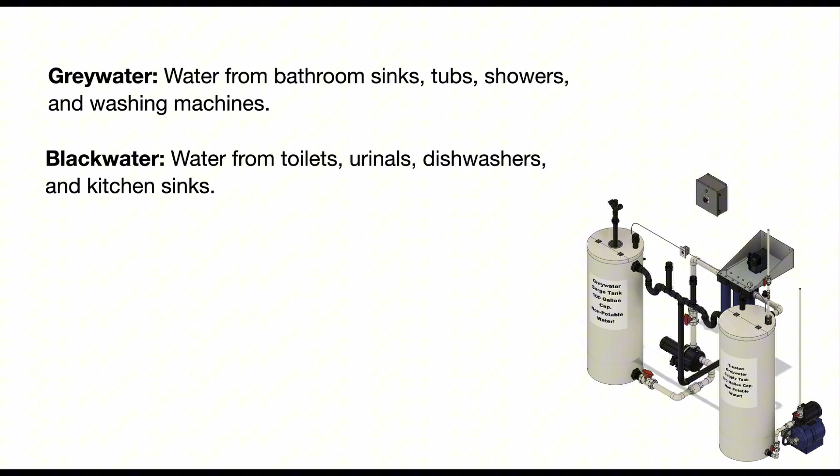So let's define some terms. Graywater is water from bathroom sinks, tubs, showers, and washing machines. Black water is water from toilets, urinals, dishwashers, and kitchen sinks. Non-potable water is water that is not safe to drink, cook, or bathe with. Potable water is safe to drink, cook, or bathe with.

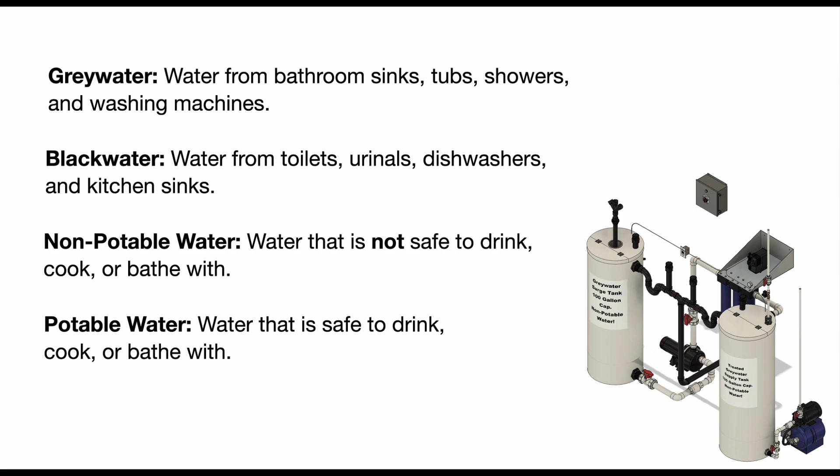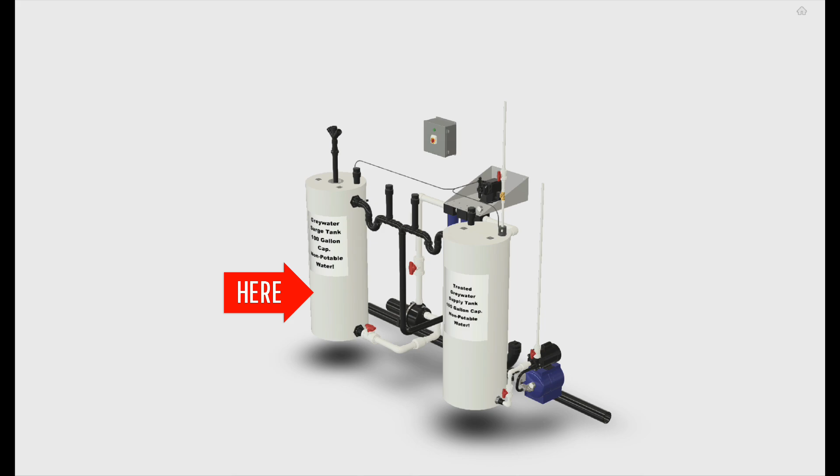So we are only reusing gray water, not black water. Here is a complete home graywater reclamation system. It's a 2-tank system. The first tank you see here is the surge tank. That's where all the raw untreated gray water comes into the system from your washing machine, bathtub, shower, and bathroom sinks.

There is a float switch inside that surge tank that, as the water level rises, floats up and turns on the filter pump, pumping the water through a 3-stage filter.

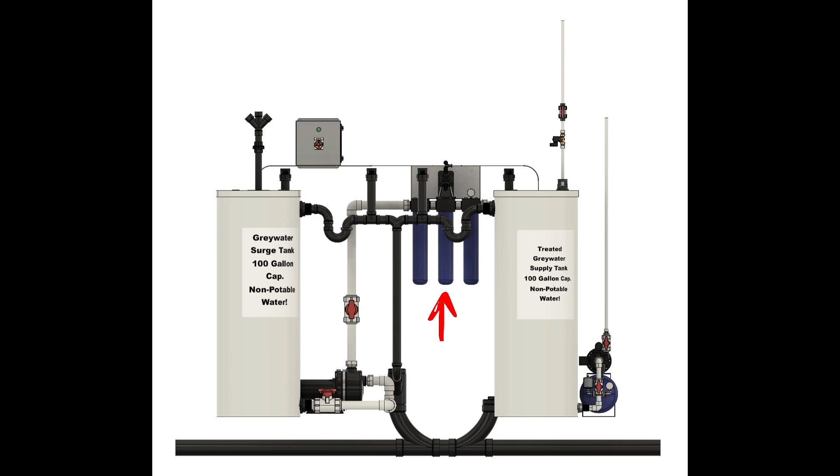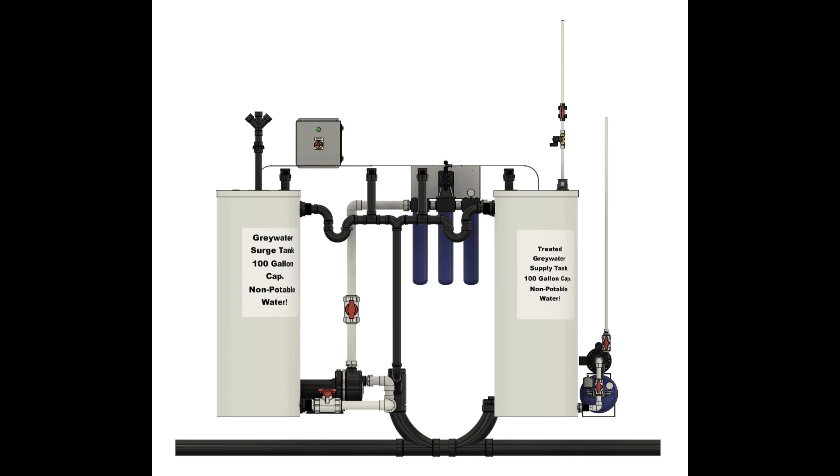They're cartridge filters. The first one is a 10-micron sediment filter. The second filter is a 5-micron granular activated carbon filter. And the third and final filter is a nanofiber filter, although you could use a reverse osmosis filter, and that's mainly for getting rid of the soaps in the gray water. However, it gets rid of a lot of other contaminants in the water as well.

Each of the tanks has a UV sterilizer light inside. There's also an aeration pump that is constantly blowing a small amount of air through air stones submerged inside each tank, to constantly aerate the water in both tanks. That way the water can never grow stagnant.

As the water passes through the 3-stage filter, it goes into the supply tank. And whenever you flush your toilet, the supply pump, a shallow well jet pump, will turn on and supply treated gray water to flush and fill your toilets.

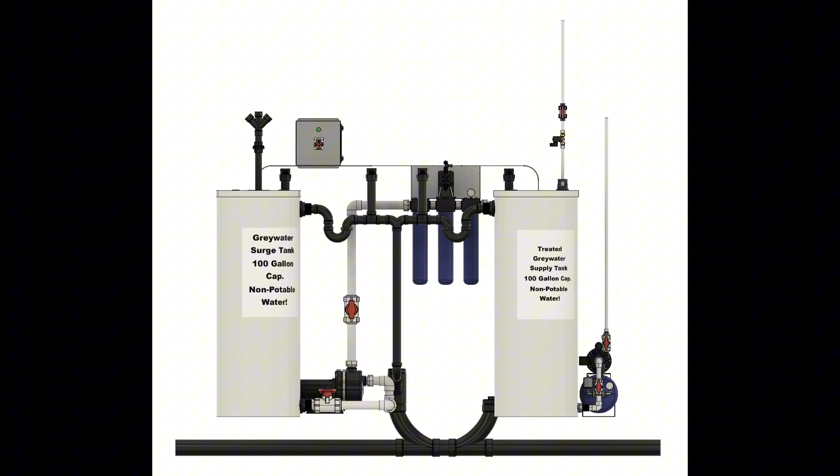It can also be used for landscape irrigation. However, I don't recommend it because unless you have a drought-tolerant landscape that requires little to no water, you're going to burn through your treated gray water very quickly if you're trying to irrigate your landscaping and flush your toilets. And if you're even using your treated gray water to supply water to your washing machine, you can see how you'd very quickly run out of treated gray water.

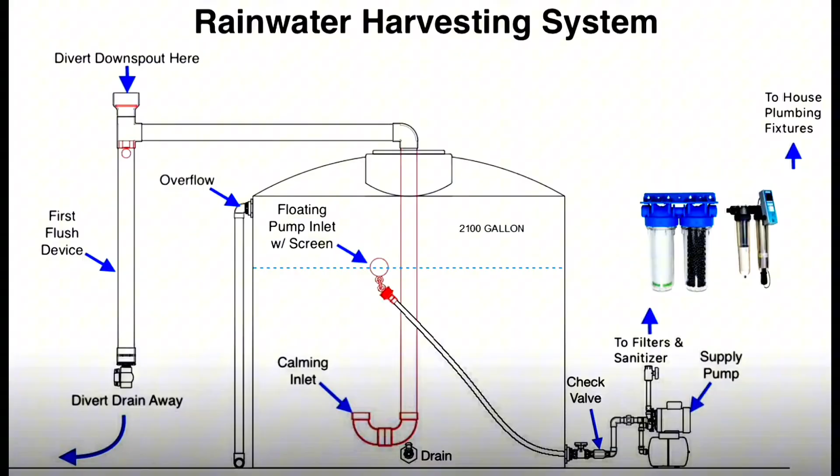So instead, I would recommend using a rainwater harvesting system if you want to irrigate your landscaping. I'd still highly recommend a xeriscape landscape, drought-tolerant native plants, decorative river rock, etc.

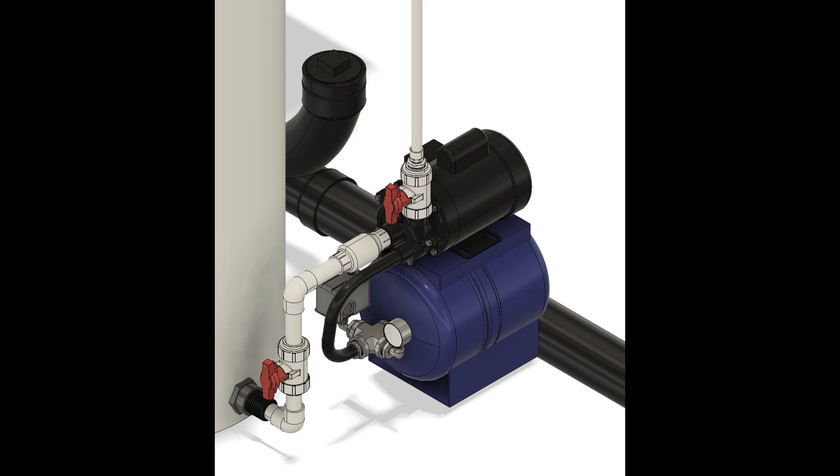That supply pump is a shallow well jet pump. It's controlled by a pressure switch. So when you flush a toilet, for example, that pressure switch will detect the difference in pressure and cause the pump to turn on until the pressure switch is satisfied, then the pump will turn off.

There's also a float switch inside of the supply tank to protect the supply pump in the event that the water level gets too low in the supply tank. It's not going to turn the pump on, cavitate the pump, and damage the pump.

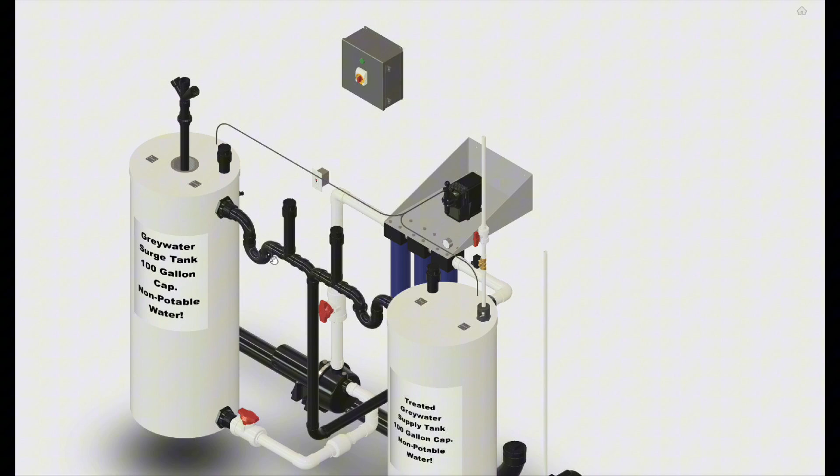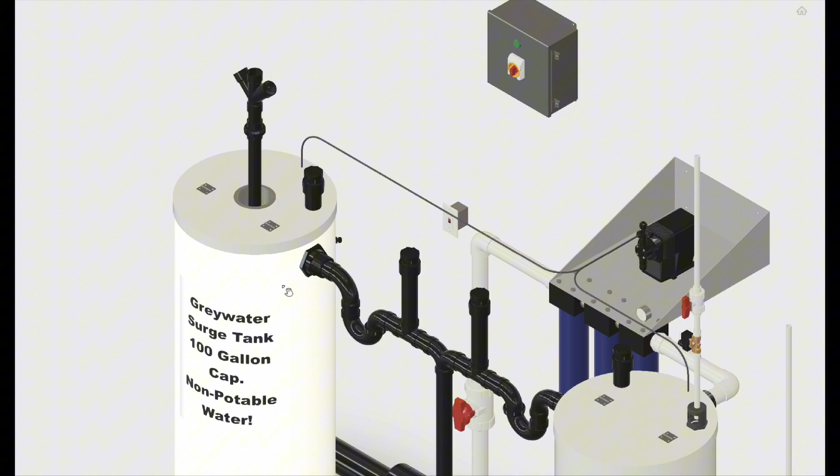There's a second float switch in that supply tank that is connected to a 120-volt solenoid valve, a freshwater makeup valve. As the name implies, that makeup valve is only to make up water inside the supply tank in the event you're not producing enough treated gray water to meet the demand.

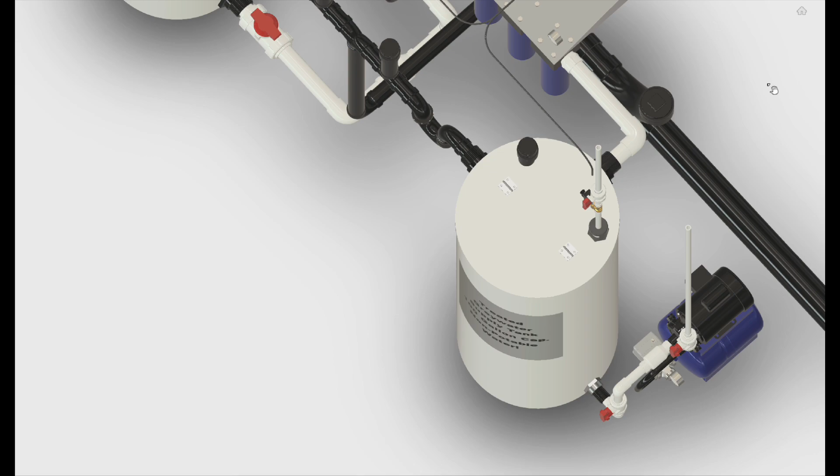That's why it's critical to make sure you size your tanks properly. I'd rather err on the side of caution and size them a little bit bigger. So how do you determine what size tanks you need? We'll cover that later in this video.

So that pretty much covers all the main components of the tanks and the pumps. Let's take a look inside the control panel now.

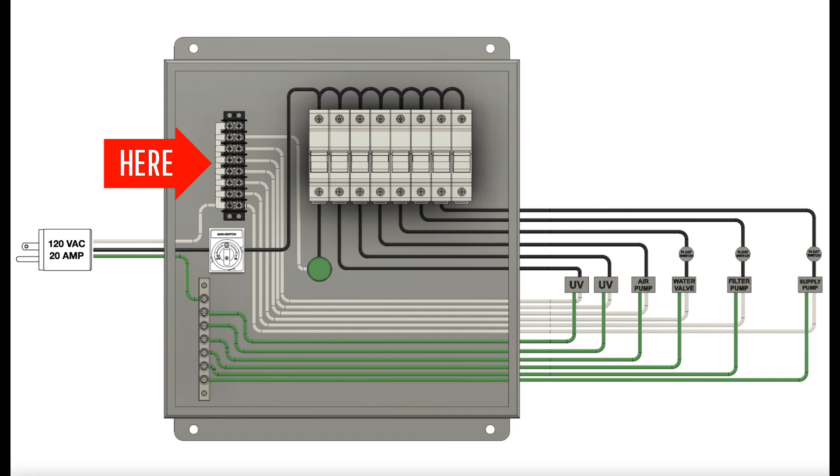There are little metal U-shaped connectors that connect each of the screw terminals on the neutral bus bar. Then you have your main black hot wire coming into your disconnect switch, and then it goes up to your fused terminal blocks. Each terminal block is daisy chained together to get 120 volts.

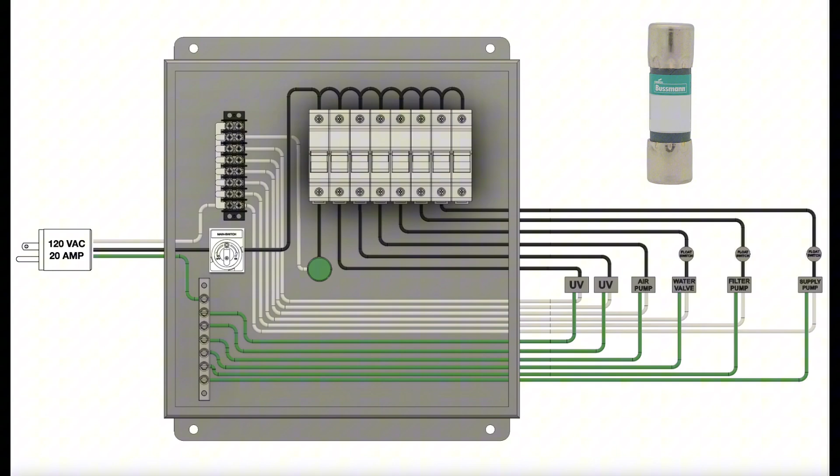There's a fuse inside each one of those blocks, and you can see the little green indicator light. When the power is on, the green indicator light will turn on, giving you a positive indication that the power is on and the system is on.

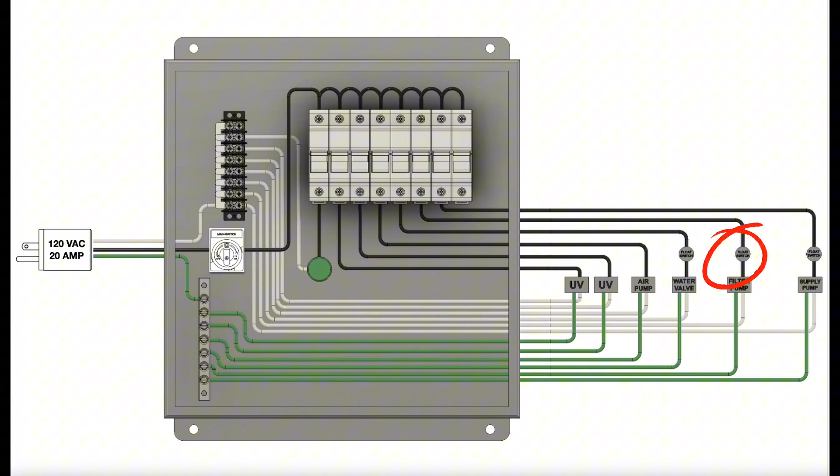You can see how all the wires are connected. You've got a hot wire going out to each of the components, both UV lights and the air pump. You also have your float switch that controls your filter pump on and off functionality, another float switch that protects the supply pump, and another float switch connected to the solenoid valve.

All of these components together need to draw at or below 80% of the circuit capacity. The pumps and UV sterilizers I spec'd out draw below that 80% capacity that the NEC requires - you can't draw more than that on the circuit. And again, it's plugged into a GFCI outlet.

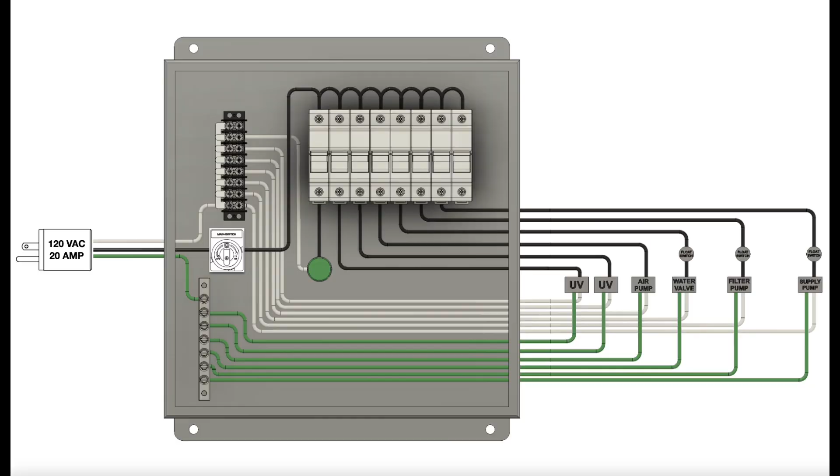This air gap fitting is a plumbing requirement, so you don't accidentally have a situation where gray water gets siphoned back into the fresh water supply line. Just FYI on that.

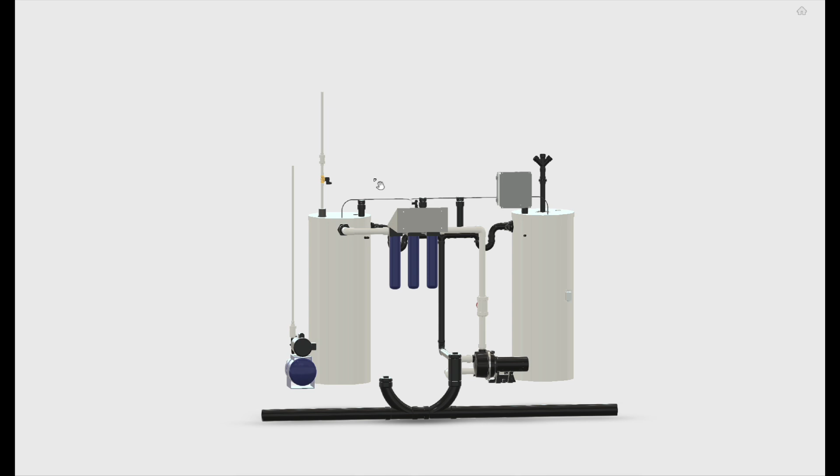In this model, you can see we simply teed into the existing sewer pipe in this house. We installed a Y fitting. Where the cleanout was, we simply moved the cleanout up a few inches, installed the Y fitting, and reinstalled the cleanout so it can still be snaked out if necessary. There's a closer look at the cleanouts on the main sewer line for this house.

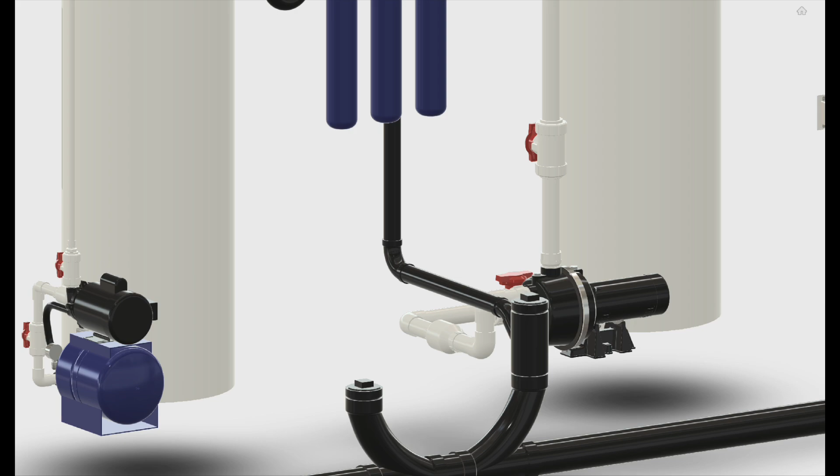You can see what I did there - I just added that reducing Y and then re-added the cleanout plug on top of that Y. The branch on the Y is where the overflow from those tanks is plumbed, so in the event that you make too much gray water, it can go out the overflow, out the drain.

Another option is this here. If you have a floor drain, you can just have your overflow pipes go directly to your floor drain. The floor drain already has a built-in P-trap, so that saves a little bit of work and cost and fittings.

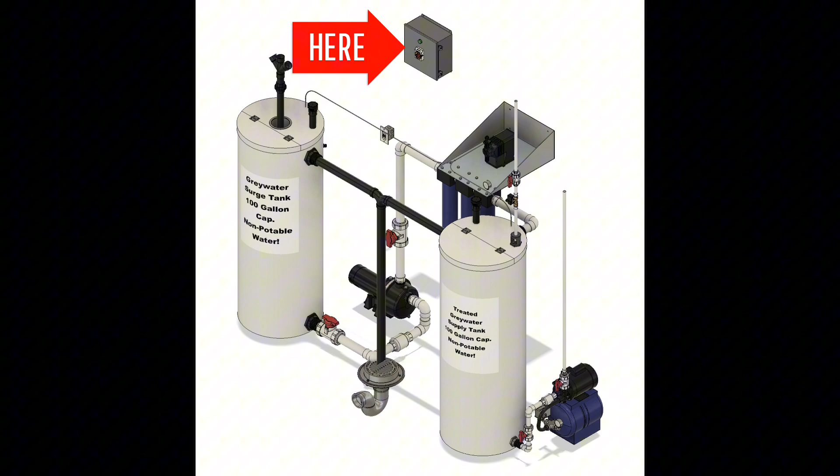So you can see a better view - the control panel there up top, the air pump, aeration pump sitting on that little mounting bracket for the filters.

I use bulkhead fittings everywhere you need to have an inlet or outlet from the tanks. Where the raw gray water comes into the surge tank, there is a metal mesh screen in there to capture large debris like human hair or cotton fibers from the washing machine.

This is what you would install behind your washing machine. You can see the black hose from your washing machine goes into this three-way ball valve. You need to make sure you have an air admittance valve to serve as a plumbing vent.

I bolted it to a wood board, bolted the wood board to the studs in the wall. That three-way ball valve allows you to divert the water either to your Greywater Reclamation system or directly to your city sewer or septic tank, just with the turn of that ball valve.

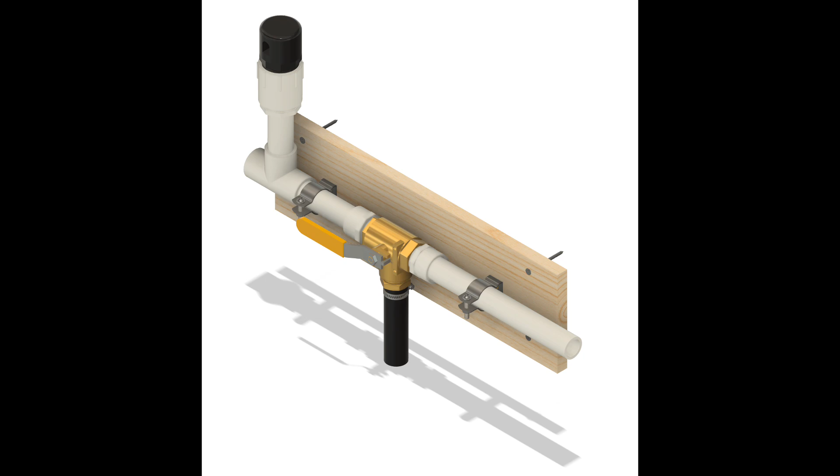This is also another option. If you don't want a complete whole house gray water system, you can do one of these manifolds behind your washing machine and divert the untreated gray water directly out subsurface to your landscaping.

Another option too is you could harvest the AC condensate or drain water from your dehumidifier and have it plumbed to your graywater surge tank as well.

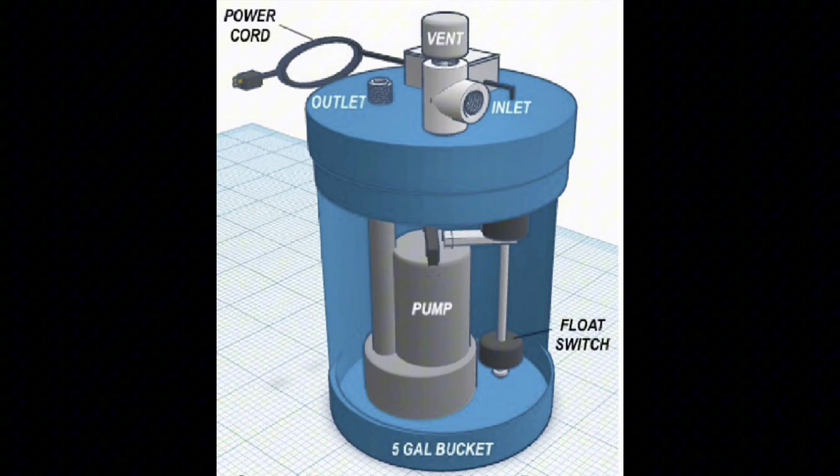Just if you want to monitor your treated gray water quality to see if your filters are working properly, if your system is working properly, that's an option.

Another option is there are independent laboratories, and even your local state government may have a water testing program where you can send them a water sample. They'll first send you a water sample kit. Follow the directions, send them the samples, and several weeks later they'll give you the results. The cost and time frame will vary depending on where you live, from state to state, from municipality to municipality. Or again, you can find an independent water testing lab online if you Google it.

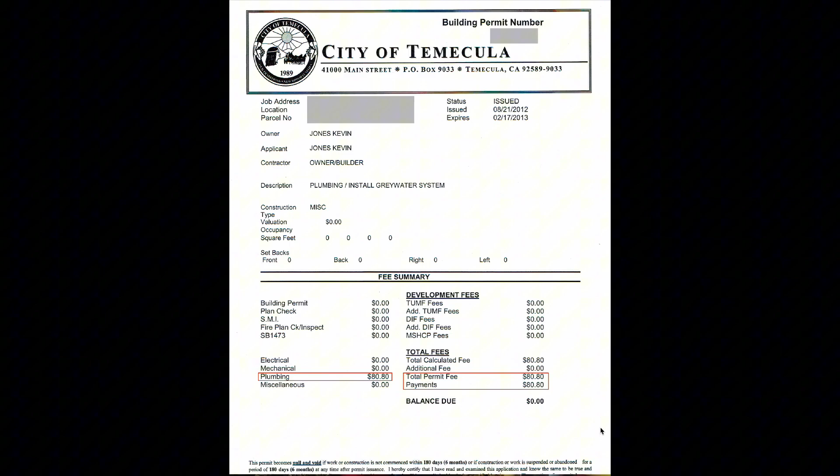So what's the process? Let's talk permitting. At the time I lived in the city of Temecula in California, I had to pay $80 for a plumbing permit. I first had to fill out a permit application, pay the $80, and one requirement was to produce an owner's manual and hang this inspection job card in my house.

You can see where the inspector signed off on it on his final walkthrough inspection. So here's the owner's manual I created. I've grayed out my personal information, obviously. Table of contents. They require things like a site plan, a plumbing plan, and a brief description of how the system will be used. And I included Chapter 16A from the California Non Potable Water.

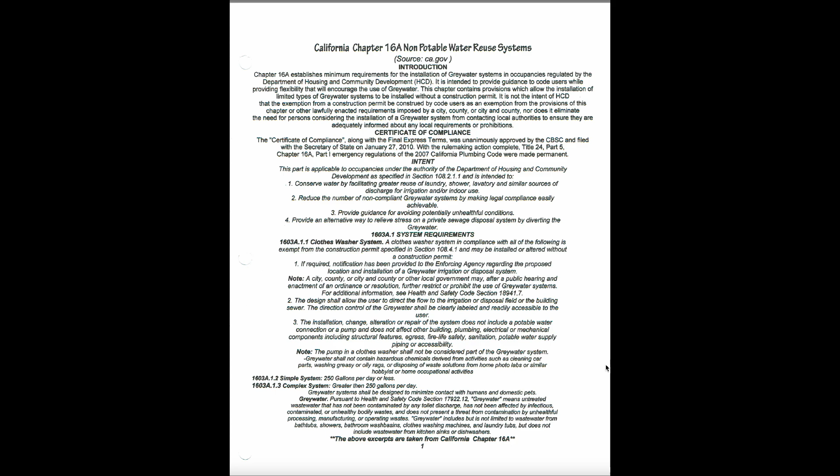Reuse systems, and it has all the legal verbiage in there about gray water systems. Again, every state's going to be a little bit different. I cannot guarantee the procedure in your state, what you will have to do or not have to do. If you live in a rural area that doesn't require a plumbing permit for a gray water system, I couldn't tell you that. You'll need to check with your local authority having jurisdiction.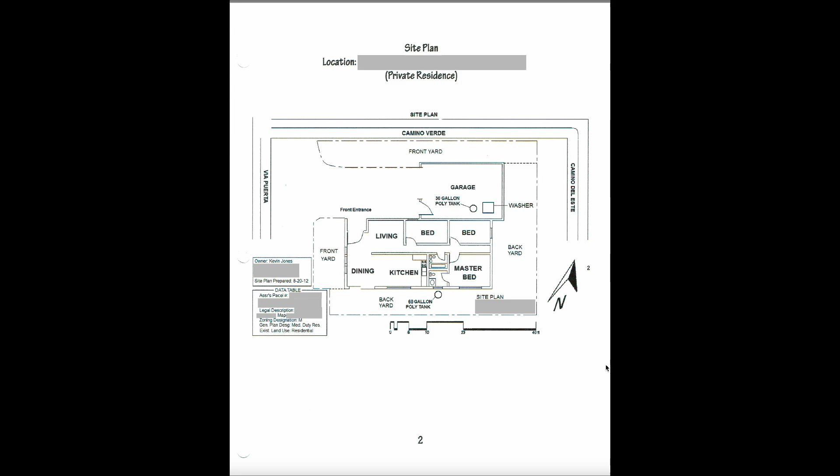So again, here's a site plan, and again I've grayed out all my personal information and site information. But there's some basic things you need, like the arrow pointing north. You need to show where the equipment is in relation to your house. And then you need a plumbing plan, which is pretty similar to the plot plan, but you can see the actual equipment and the arrows indicating directionality of flow.

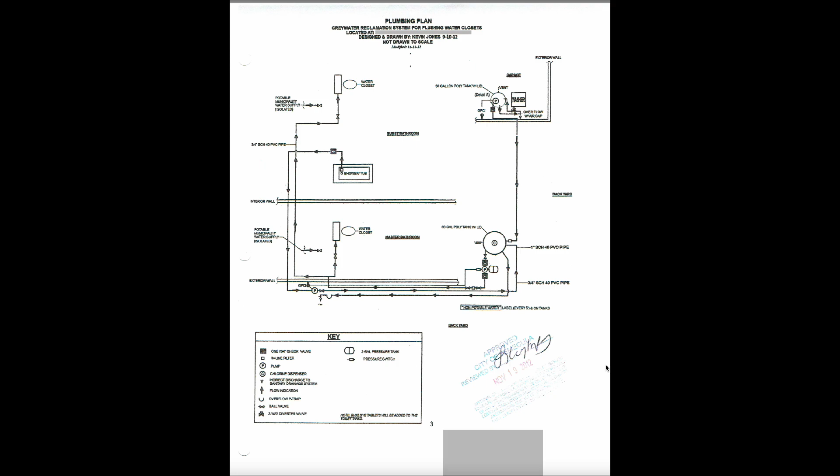And there's a key identifying all the major components and how they're connected together, and you can see where the inspector signed off on that. And then a brief use of how the system's going to be used and works.

But again, depending on where you live, the inspector may say you need to have earthquake straps around your water tanks, or they may require that you have a backflow preventer or anti-siphon check valve on your fresh water makeup water line, for example, instead of just an air gap. Again, every authority is going to be slightly different.

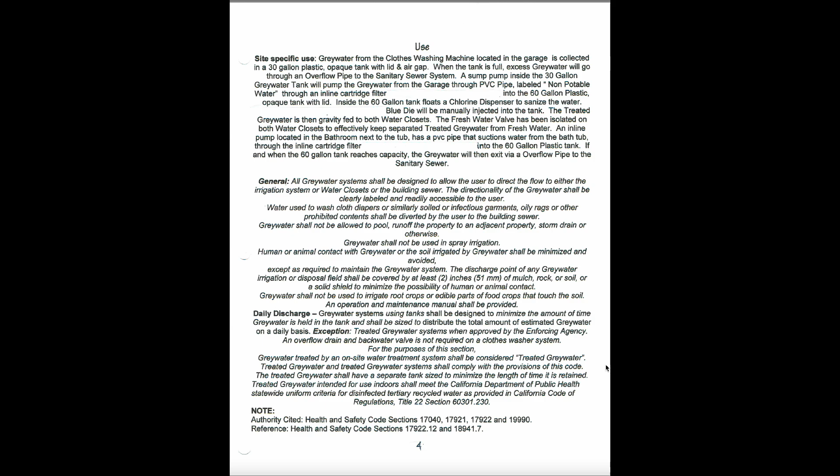And you also want to cap off and completely shut off the freshwater supply line going to your toilet. You'll remove the supply line from the fresh water valve at your toilet, and you'll plumb in a new separate water valve and separate gray water line that will attach to the supply line on your toilet. So that way there's no chance of any cross-contamination between your gray water line and the existing potable water line, if that makes sense.

You also want to make sure that you label all your piping with a greywater system sticker, and then you need to label or hang a sign at each of your toilets that you're flushing and filling with greywater. Also make sure you turn off and cap off the water supply valve to your toilets and move the supply hose over to a new separate greywater supply valve, so there's no chance of cross-contamination between your greywater supply line and the potable water supply line. I hope that makes sense.

Now, in regards to what size tank, how do you calculate that? What size filters, pumps, etc.? You first need to get a piece of paper or a spreadsheet.

You need to write down how many people live in your house or building. How many showers do they take a day? How many minutes is each shower? What is the flow rate of your shower heads? What is the flow rate of the bathroom sinks, the aerators on the faucets? What is the gallon per flush rating of your toilets that you're going to supply with greywater?

You need to identify specifically what you're using the greywater for, so you can calculate how many gallons you'll need to flush and fill your toilets, for example. Calculate how many gallons of greywater on average you produce per day in your household.

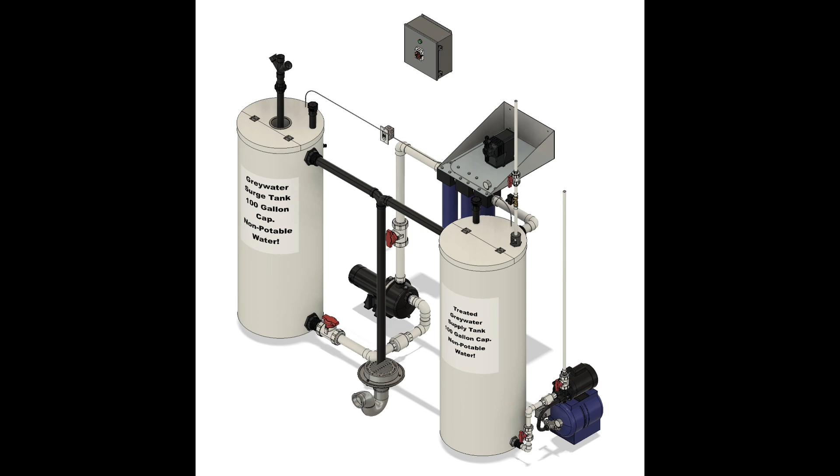And some municipalities may require you to dye the water that's feeding your toilets. A simple way to accomplish that is with those little blue hockey pucks that you can drop into your toilet tank - that'll dye the water to accommodate that requirement if it's necessary in your area.